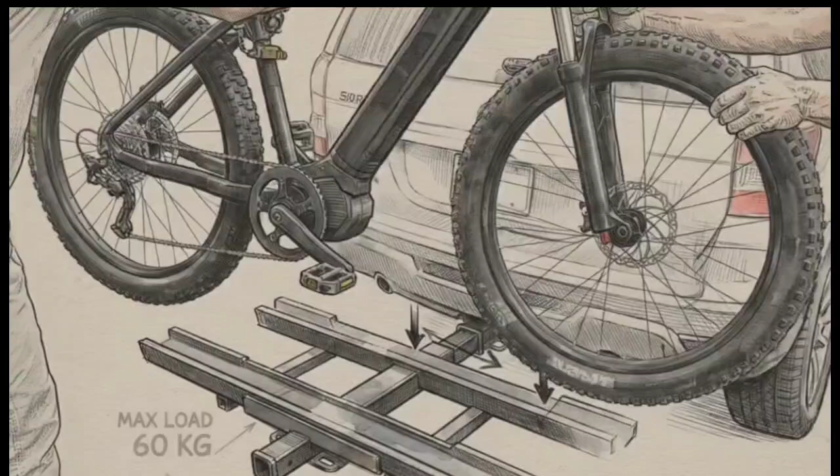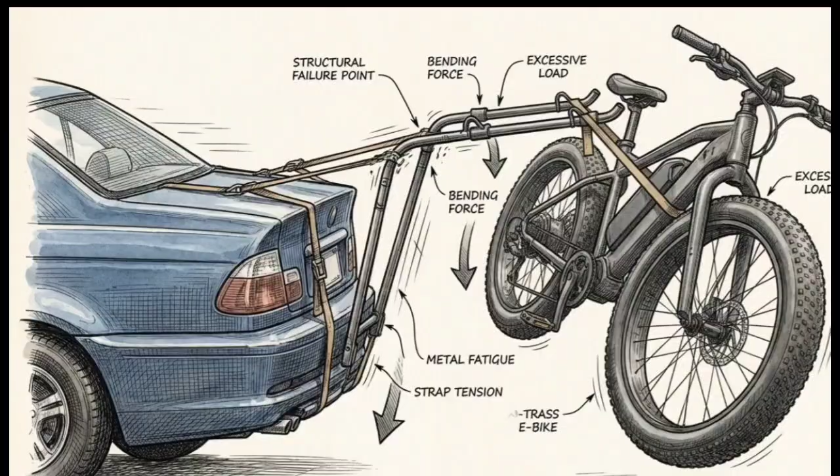Modern e-bikes have rapidly outgrown older transport racks. We are now dealing with 70-pound machines built with large battery packs and thick frames. Strapping that kind of weight onto an older, hanging-style rack designed for a lightweight road bike creates a serious structural liability. It's a highway disaster waiting to happen.

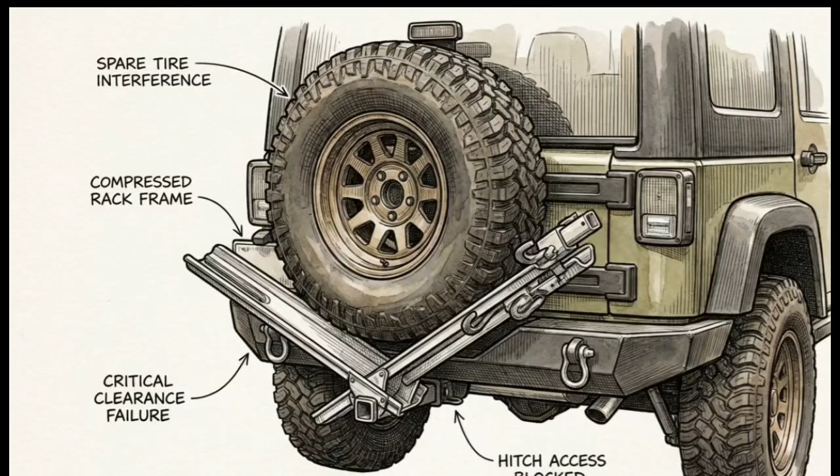Then you have to factor in modern vehicle geometry. Automated lift gates and rear-mounted spare tires make getting your bike to the trail a frustrating logistical hurdle. Safely transporting gear today requires hardware engineered specifically to handle both the extreme weight of your bicycle and the exact layout of your vehicle. This brings us to the heavy-duty platform rack category.

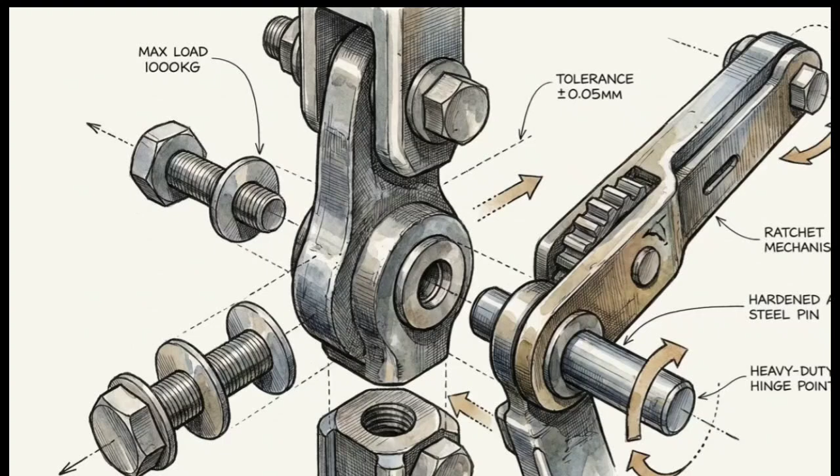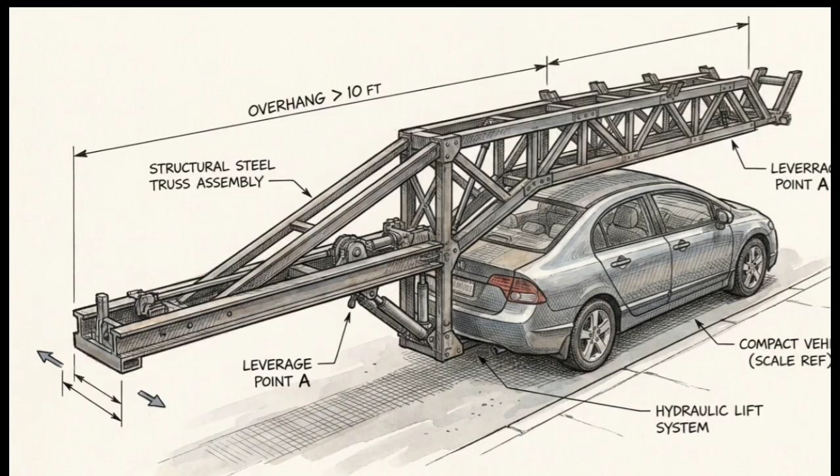We're going to use the Wild Road 2-bike rack as our prime case study for massive utility hauling. The goal here is practical, helping you determine if you actually need a rack with a 180-pound capacity, or if you are needlessly over-equipping your daily driver.

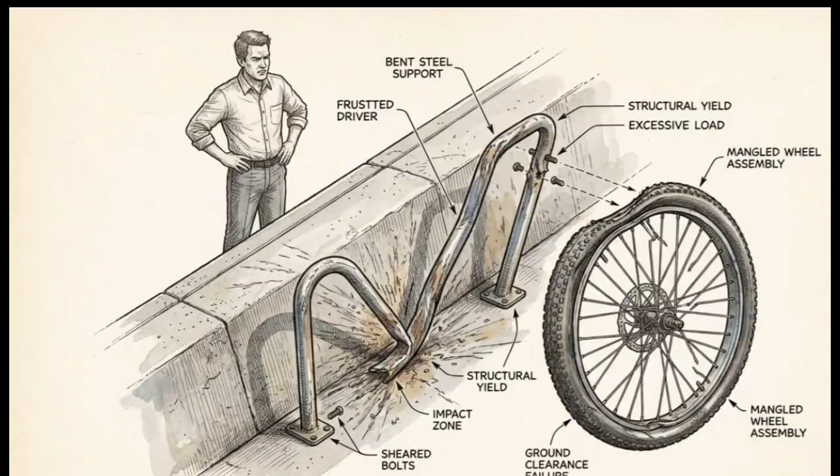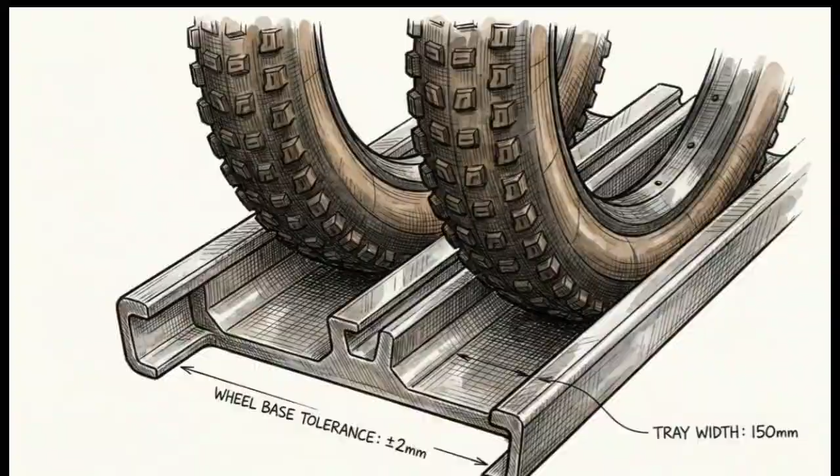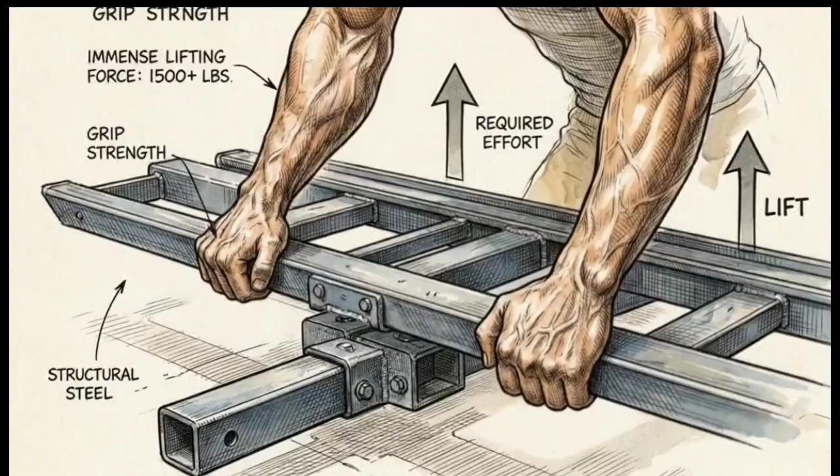The massive weight capacity means the rack itself is incredibly heavy, turning seasonal installation or removal into a sweaty, difficult chore. High structural capacity demands both a heavy-duty connection on your vehicle and a willingness to wrestle with a bulky piece of hardware. Moving past the hitch connection, we need to look at the actual hardware that touches your bicycles, starting down at the base trays.

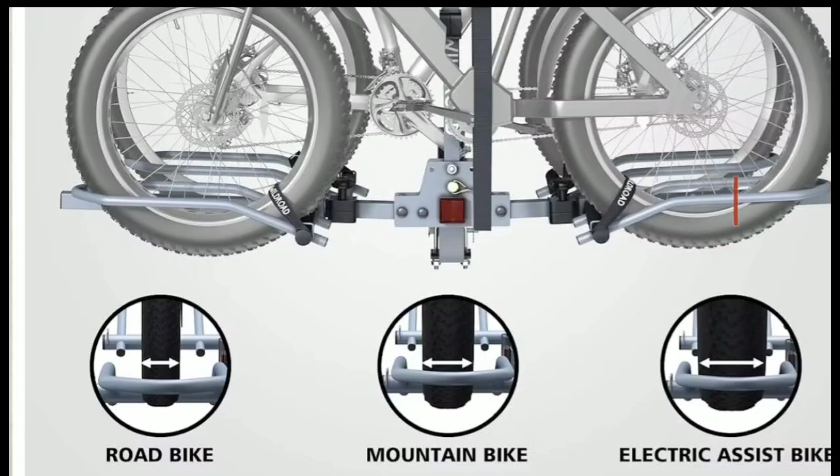The bottom 3 circular cutouts on this image show how the ultra-wide 5-inch wheel trays are specifically engineered to swallow massive fat tire e-bikes and modern mountain bike treads.

For casual riders, this creates a problem. Placing a thin-tired carbon road bike in a massive 5-inch tray requires very careful ratcheting down to prevent dangerous high-speed wheel wobble on the highway.

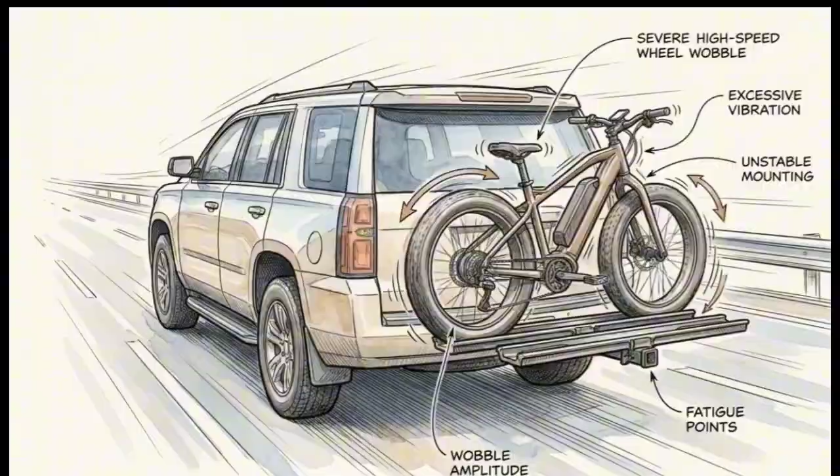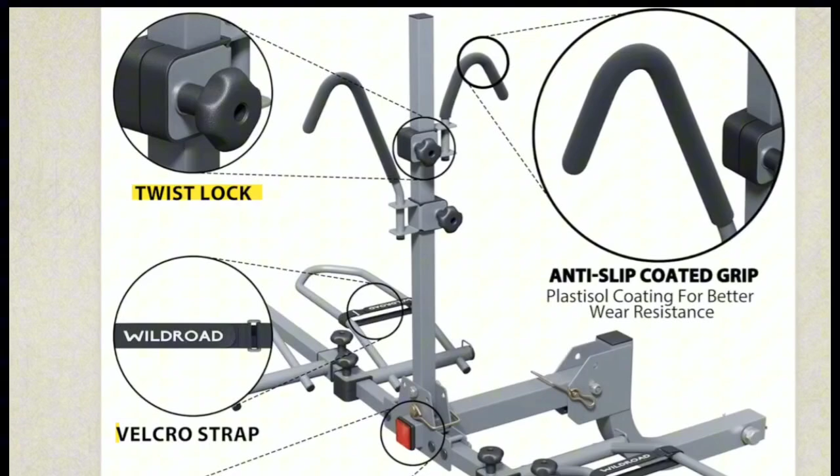This diagram shows the vertical stability system. The right circle details anti-slip plastisol-coated top hooks, locking firmly over the frame. On the left, twist lock knobs and Velcro straps secure maximum downward pressure with high wear resistance.

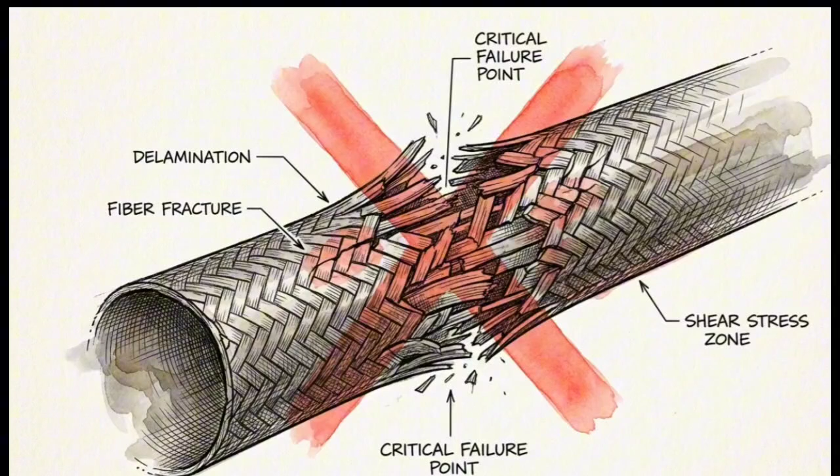The negative side of this design is that direct, hard frame contact causes paint rub and scuffing over time. It's a clamping method heavily discouraged for expensive, delicate carbon frames. This rack prioritizes raw, unyielding grip over gentle handling. It acts as a rugged utility tool, not a delicate cradle.

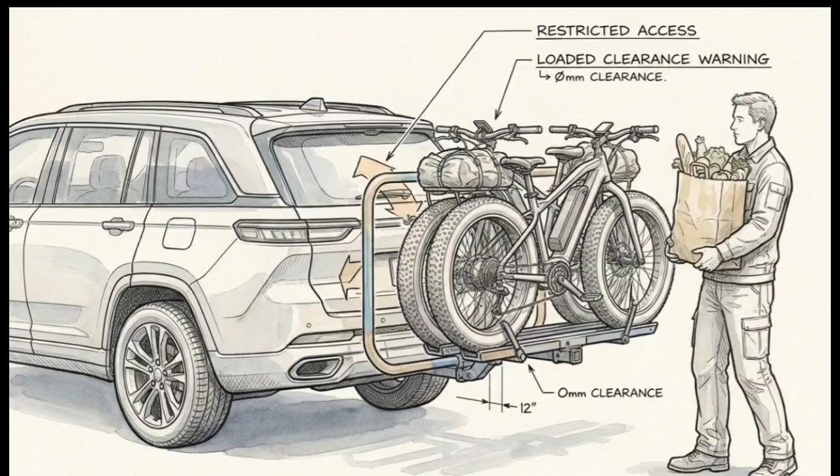The final major friction point of any platform rack is the risk of permanently losing access to the rear trunk or hatch of your vehicle. Notice how the extended drop shank pushes the entire assembly back. This creates enough clearance for the rack to bypass massive rear-mounted spare tires.

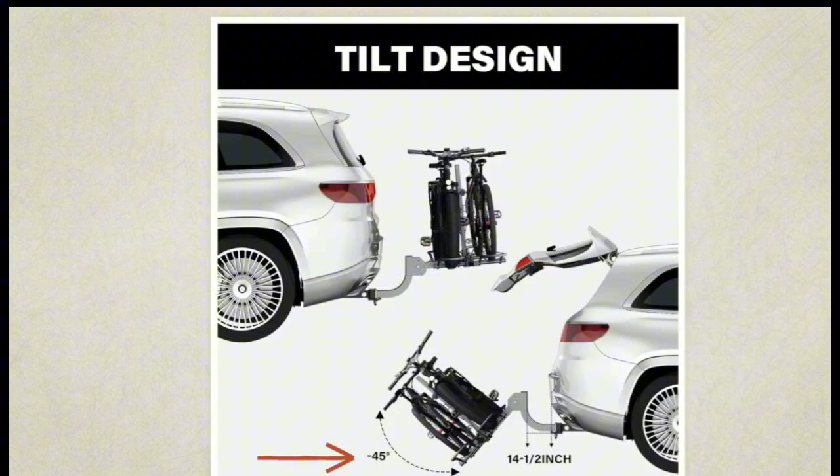This 3-part visual demonstrates the mechanical tilt feature. The entire rack drops downward at a negative 45-degree angle, allowing the driver to open the liftgate while still holding 180 pounds of gear. This side profile graphic illustrates the hidden spatial trade-off.

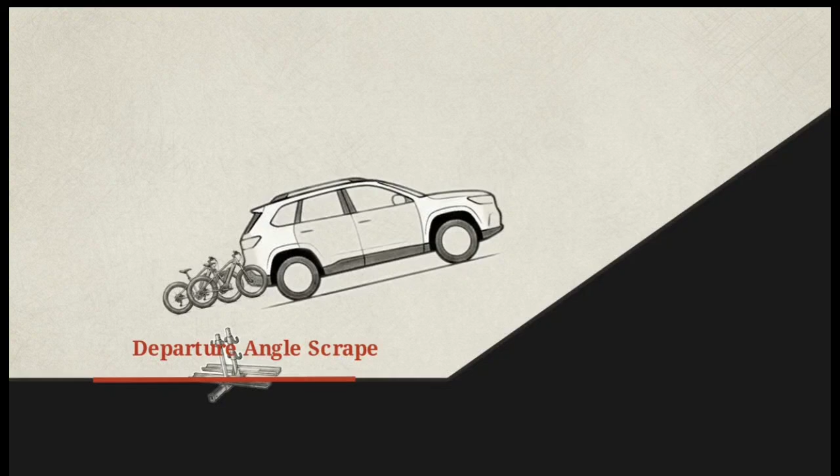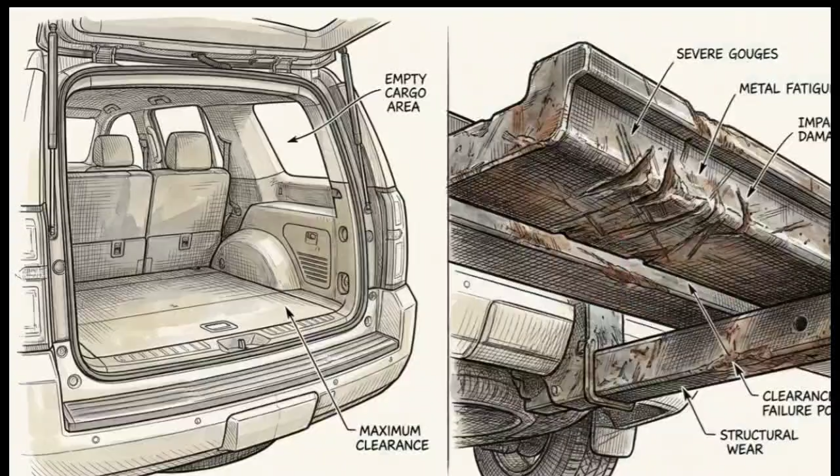The massive extension drastically alters your departure angle. On a steep incline, the rack is likely to scrape the ground before your rear tires even hit the slope. There's also a secondary daily annoyance. Even folded cleanly against the bumper like this, a rack of this size completely blinds standard factory backup cameras. You gain uncompromised access to your cargo space, but you sacrifice rearward visibility and off-road maneuverability to get it.

We can map these extreme specifications back to real-world rider profiles to find exactly who should buy this. The primary filter is hitch size. A 1.25-inch receiver disqualifies this hardware. You need a 2-inch hitch.

Next is bike weight. Standard analog bikes don't need 90 pounds of capacity. Finally, vehicle type. Sedans don't benefit from extended shanks meant for spare tires. The ideal buyer needs to pass all three of these specific hardware gates to justify the purchase.

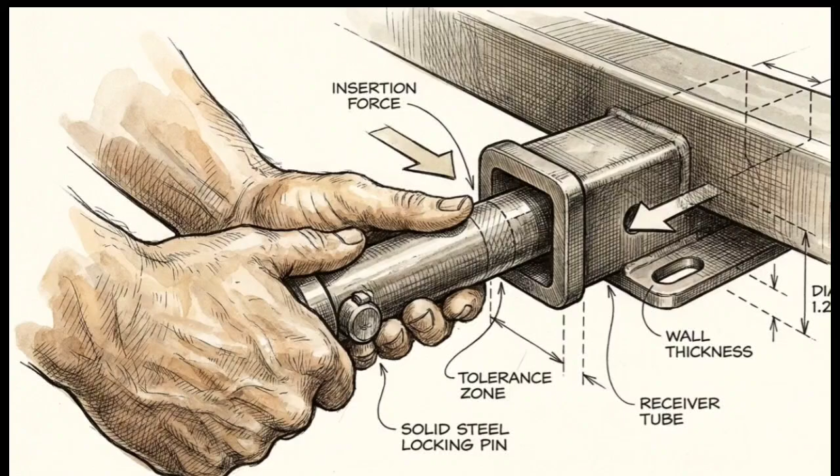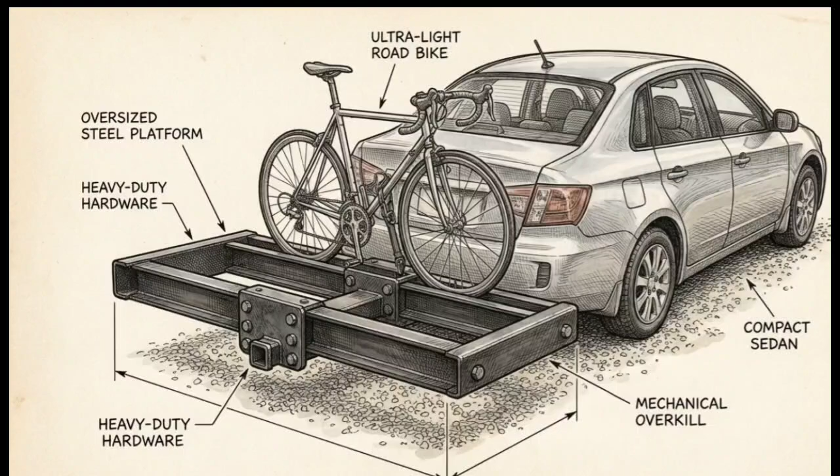The perfect fit for this rack is the overland SUV owner with two heavy fat-tire e-bikes who demands unimpeded rear hatch access. If you are a casual road cyclist or a sedan driver who values a lightweight, easily removable rack over raw weight capacity, you should avoid this model.

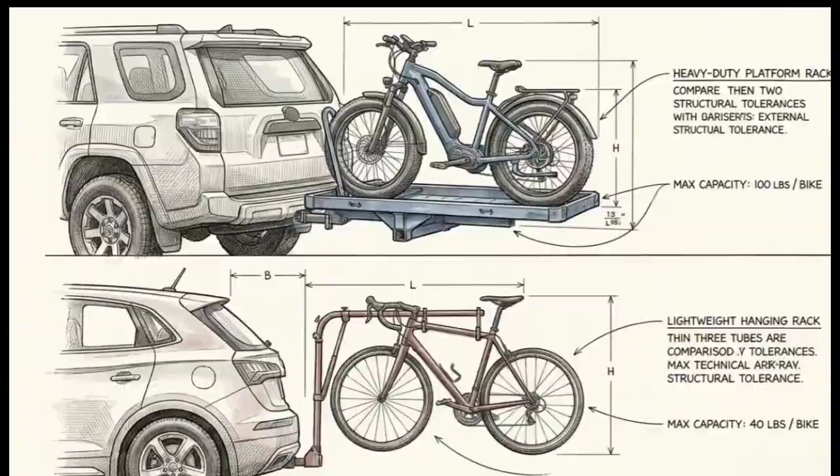Buying a 180-pound capacity rack for a 20-pound road bike isn't future-proofing. It is an unnecessary daily burden that makes parking and removal a chore. Match your hardware to your absolute heaviest use case, and nothing more. A high-end bike deserves high-end security, as long as you respect the physical limits of your vehicle's foundation.